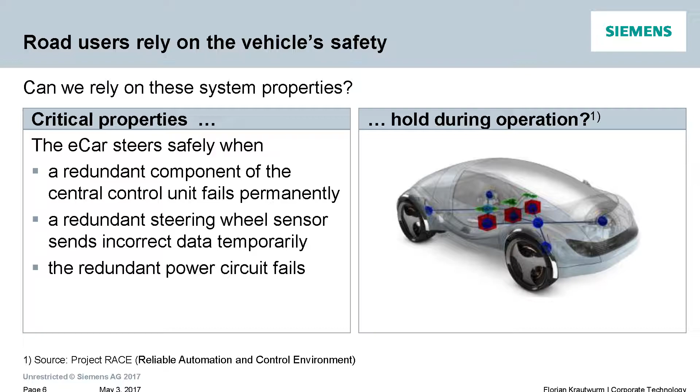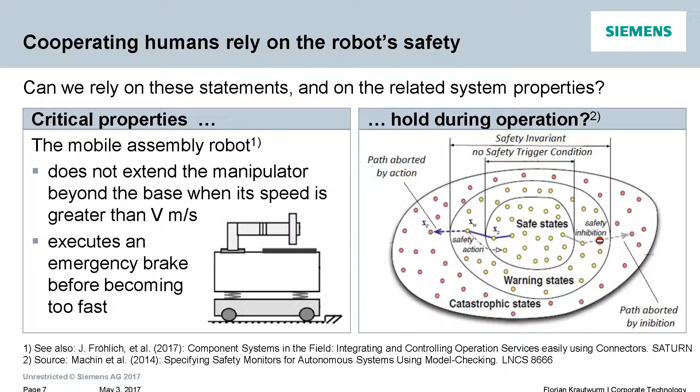And this idea of critical system properties is not only true for eCars, of course, but it can be transported to any domain. So let's have a small excursion to the robotic domain. And you might remember this example of the mobile assembly robot if you attended my colleague Markus Lachenmeyer's talk on connectors yesterday. And just as an example, we want to be sure for the manipulator here that in operation there is no accident in human-machine or machine-machine interaction, and therefore there are of course several critical system properties that should be fulfilled, that should hold during the whole operation time.

But back to the road. What am I talking about? So this critical system property I'll show you in a scenario. Here we have the scenario of the safe steering function in 3 phases. In the first phase, you can see a happy driver. He's reading his newspaper. He can do this because he's, of course, driving autonomously.

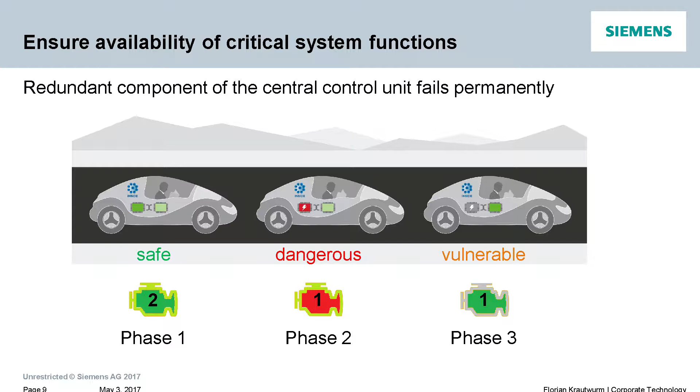You see that there are 2 components in the car. There's a dark green one, that's the component that's at the moment executing the steering function as authority. And there's a backup component in there, that's the bright green one. So in phase 1, we are safe. We have 2 components at all.

In the next phase, all of a sudden, something dangerous happens, and the component that is at the moment the primary, the former dark green one, shuts down. So for a short period in time, there is no component at all that's now executing the steering function as authority. The driver is unaware, but of course, that's a dangerous situation.

Fortunately, in the last phase, the former backup component gets promoted to a new primary one. So at the end, everything is fine. We have a happy end. The driver is still unaware, but now should, of course, be informed that there's a problem and that he has to go to service. So having seen this scenario, let's analyze it phase by phase.

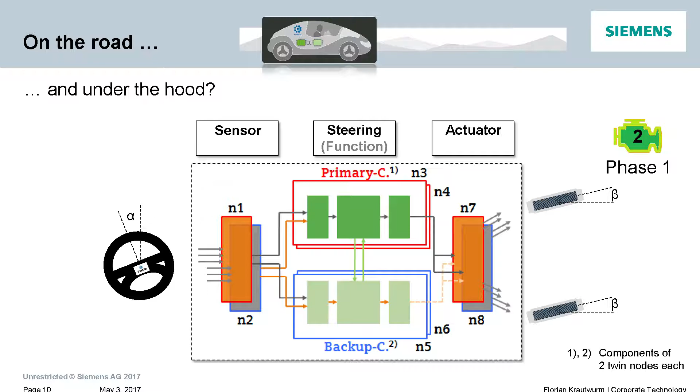Back again in the first phase, we see the happy driver. There are again 2 components in there, the dark green one, that's the authority for the steering function, and the bright green one as backup. And if we look at the center of the slides, we can see that the authority component is called primary component, and here's the backup component.

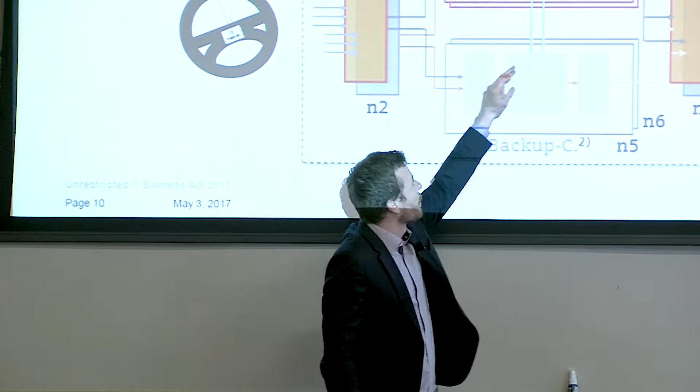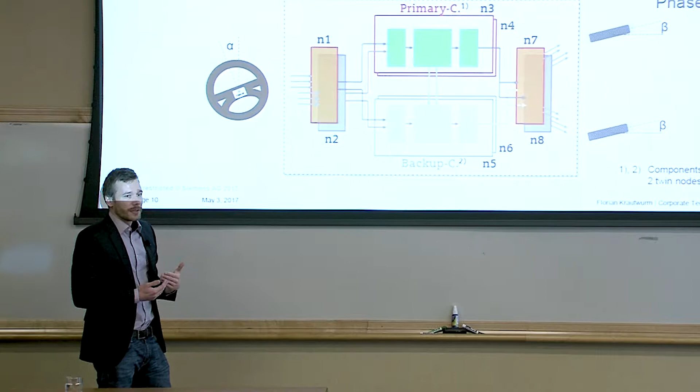And each of these components actually consists of 2 nodes. So for the primary component, we have node 3 and node 4. And so it's called a dual node. So we have 2 dual nodes in here, and in the primary component, the nodes, node 3 and node 4, are monitoring each other. So they can see each other's state and can see what happens. The same is true, of course, for the backup component.

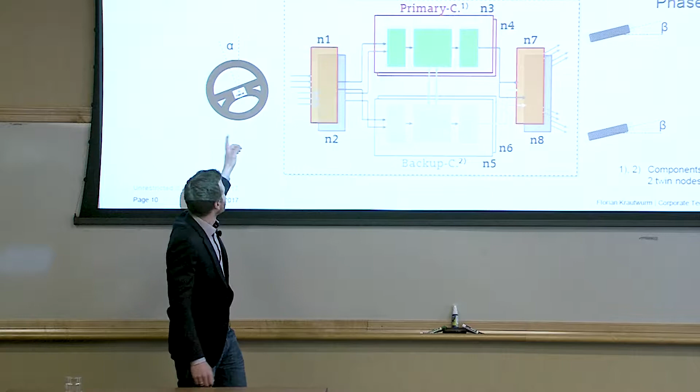We can see that there are 2 redundant sensors on the left, the steering sensors, and we have 2 redundant steering boxes on the right that are controlling the wheels. The steering sensors are sending the data to the primary component, but also to the backup component, and they're doing this clockwise and counterclockwise to also get redundancy here.

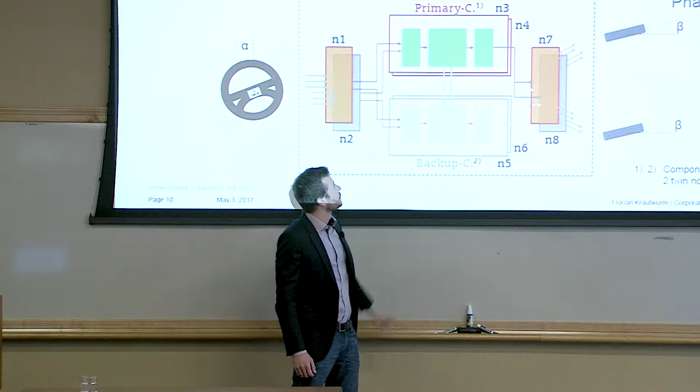On the other side, we can see that the steering boxes are just getting their data out of the primary component. So that's the master component for the steering function. The other one is just in hot standby. So we have 2 components, 2 dual nodes, and we are in safe mode.

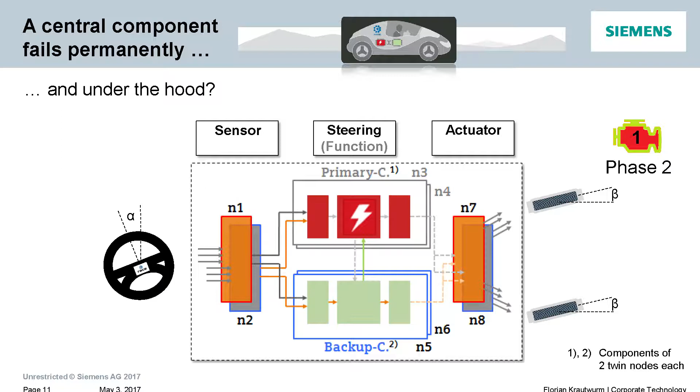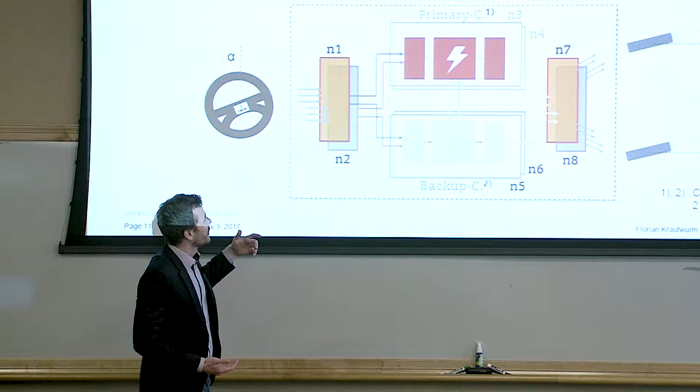So now again, all of a sudden, for whatever reason, something dangerous happens. Node 3 and node 4 that are monitoring each other, they detect an inconsistency and they decide to shut down the system. So for this short period of time, there is no primary component, there is no one as authority executing the steering function. Nevertheless, the steering sensors are sending their data to both components, but now we see that the steering boxes aren't getting any commands at all.

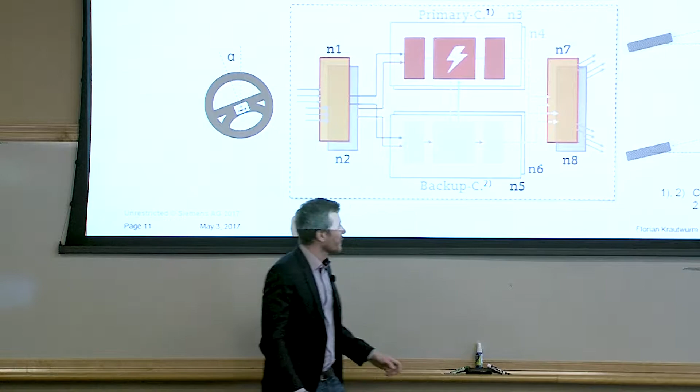I think we can agree that this is a dangerous situation and that the eCar integration platform, that's the thing we're seeing here, has to detect it and has to repair it silently. So the driver wants to be unaware, reliably of course, and especially quickly. Fortunately, that's exactly what happened.

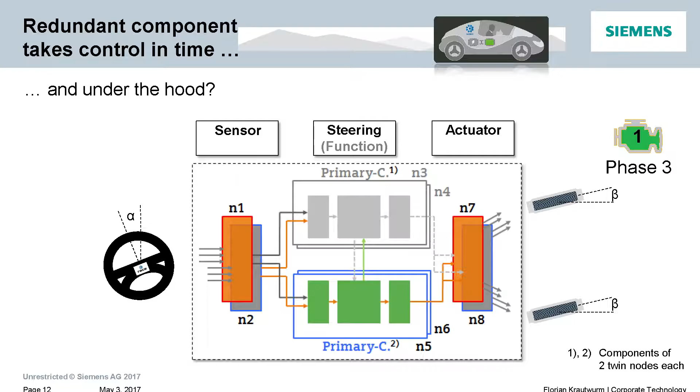So in the third phase, we see that the former backup component was promoted to the primary one, and these components are of course also exchanging data. So these sensors are still sending data to both, but now the actors, the steering boxes, are getting their commands from the new primary component.

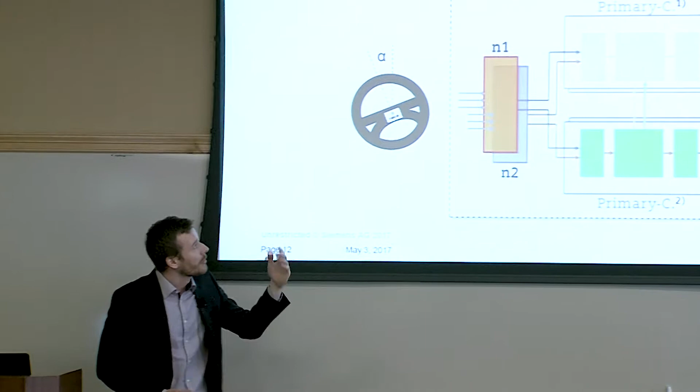Everything is fine. The driver is still happy, still reading, but now has of course to be informed that he has to go to service, because in vulnerable mode there is no longer a backup, and of course we need a new one and it has to be repaired.

Having seen this, how does the system under test look? No, first we see again a critical system property. The property says again that the eCar steers safely even when the redundant component fails, and we see again the three phases. And to test this, before we see the system under test, we of course have to derive testable statements, testable requirements. In our case, critical apps run on at maximum one primary component, so we always had just one.

In safe mode there are at least two components running the critical app, so we have a primary component and a backup component. In dangerous mode, the critical apps run without a primary component for a specified number of cycles. We called it Y, and this Y is dependent on the task, in our case the steering function, but also the state, the environment, so what's the weather, how fast are we driving, and things like that. And in vulnerable mode, critical apps run on exactly one component, and this has to be the primary one.

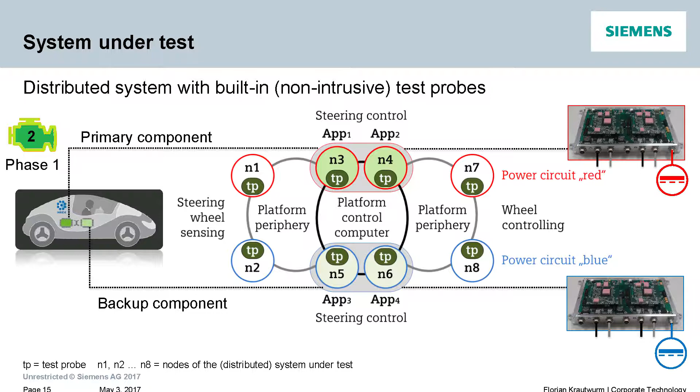Now we see the system under test. That's the central integration platform, and essential for our test cases are again the two nodes we see here. On the top again the primary component consisting of node 3 and node 4, and the backup component consisting of node 5 and node 6. We also see again the two redundant sensors and the two redundant steering boxes. And that's now the first time that you can actually see the test probes that I promised you at the beginning. So we have dedicated test probes that are an integral part of each of the system nodes, and we'll use them some slides later.

The sensors and the steering boxes are part of the platform periphery, and they are connected to the inner nodes by a so-called outer ring. That's the gray one. They can communicate. And we saw also that the inner nodes can communicate, and they are using this inner ring. That's the black one here. On the right, you can see the actual hardware. Each of these is one dual node consisting of two twin nodes each. And you can see the dedicated ports, so we have ports for the inner ring and the outer ring each.

And you can also see that we have a redundant power circuit. The red one for the upper nodes and the blue one for the nodes on the lower side, because a cut through the power circuit would be a single point of failure. And so we also need redundancy here.

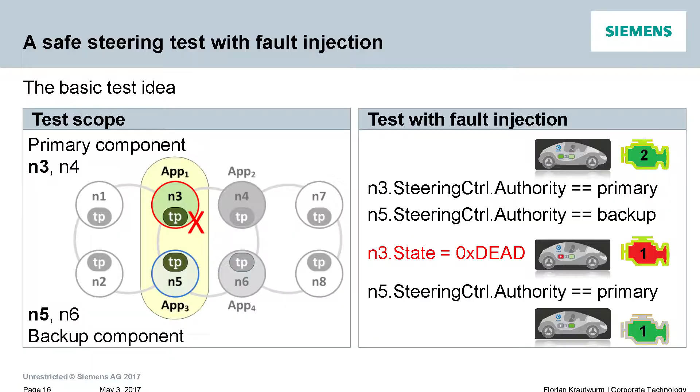So what's the basic test idea now? The basic test idea is to restrict the test scope to just two of the nodes of each of the different dual nodes. So we're taking one node of the upper dual node of the primary component and one node of the lower dual node. And the reason is that we can exploit the fact that for corrupting the state of, for example, the primary component, it's enough to corrupt the state of just one of its constituting nodes, because they, as I said before, are monitoring each other and therefore will find the error and shut down.

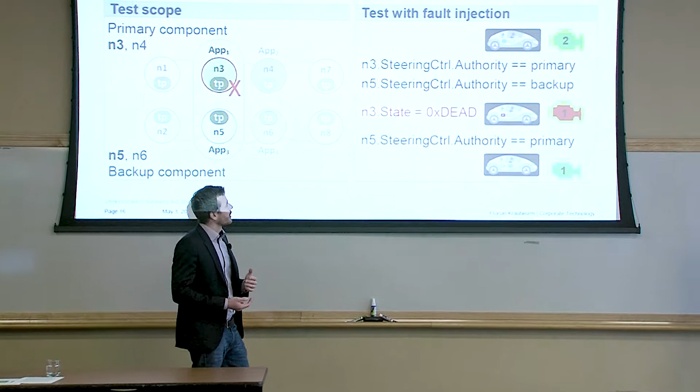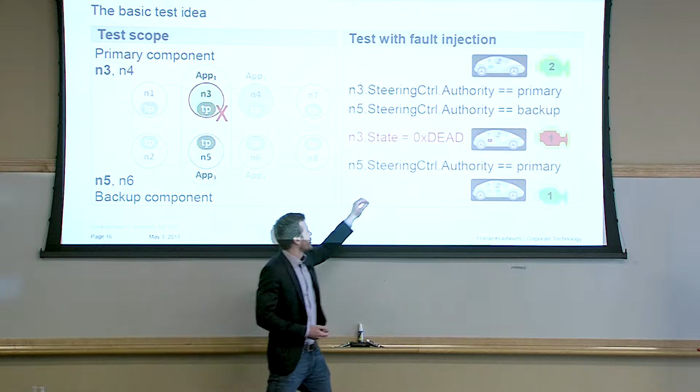You can see the basic test idea on the right. For the steering function, we want to start in safe mode. That is, we need a primary node for the steering function, that's node 3. We need a backup component for the steering function, that's node 5. And now to get into dangerous mode, we need to shut down one of the nodes, and we are doing this by injecting an error in the state of node 3.

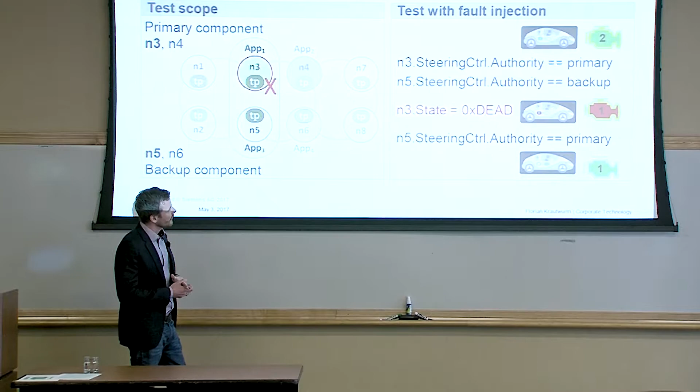Now the two nodes of the primary component will detect this inconsistency and therefore will shut down. And hopefully, after a period of time, the former backup component, node 5, will be promoted to the new primary one, and we end up in the vulnerable mode. And if that's the case, the test case will succeed.

So after all this explanation, we are finally ready to have a look at the first real test case. Wow, and I have to admit that's a heavy one, just right before lunch. But don't worry, we will have a short walkthrough together.

So we see that we want to test a critical app. That is our steering function, and we want to be sure that it continues even when the primary component fails. Therefore, again, we need two nodes, node 3 and node 5. Just let me jump back. These are node 3 and node 5 of the two different dual nodes. And we want to inject an error in the state of node 3 starting at cycle 10 for 3 cycles.

And that's exactly what we do on the right. We need the primary component, that will be node 3. The backup component will be node 5. And we are using the invariants I promised you at the beginning. This invariant will be checked in each cycle, and it has to be true in each cycle. Our invariant is defined as either node 3 is primary or node 5 is primary. That was the first requirement we saw on the slide with the critical system properties.

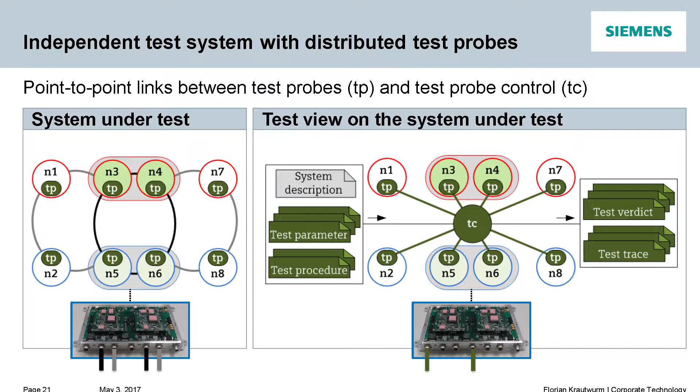And here you can see one important measure that we are using for non-intrusiveness and for testability. We are using a completely separated network in the eCar. So it's really a physically separated network as an example of exclusive hardware-software resources. And you can see on the bottom, again, the actual hardware with the inner and the outer ring each. And there are 2 ports left, and even these 2 ports are dedicated ports just for the test network.

You can see that the test network is organized as a star. So we have the test controller in the center, and it's connected to each of the distributed test probes to guarantee a fast point-to-point connection here. So we can stay in the time slots that we have in the time-triggered cyclic system. That's, of course, not the only measure that we are using. There are multiple ones. And I just want to pick out 4 of them on the next slide.

We are in a time-triggered system, as I said before, and we can use this cyclic time-triggered system because here we are in control and not the environment as it would be in an event-triggered system. And therefore, we can guarantee a deterministic behavior and therefore also deterministic tests for the system.

We have a data store in each node that is not to be confused with a real database. It's a memory area where modules and drivers of the node can store data and read data in their own part each, and it's also used for communication. So all the communications inside the modules, inside the services, run using this memory area.

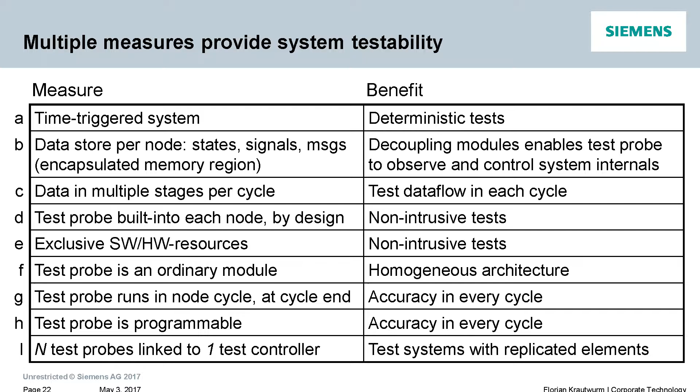One such module is the test probe that is built in by design. So it has its own time slot. It's non-intrusively usable. And this test probe is the only one that can read and write the complete memory area. That's what we did in the test cases. We injected an error in the state of the database.

And we saw on the last slide that we had a dedicated network as an example of exclusive hardware-software resources that we, of course, also need to non-intrusively test, to have no implication on the runtime of the system under test.

Thinking back to the picture of the hardware that you saw of the dual node, we now have a look at a single node. So here again is the complete hardware with node 3 and node 4. And that's a picture of just one node, in that example node 3. You can see the database residing in the center. And we have a scheduler that's cyclically time-triggered, and it's scheduling platform services and platform applications.

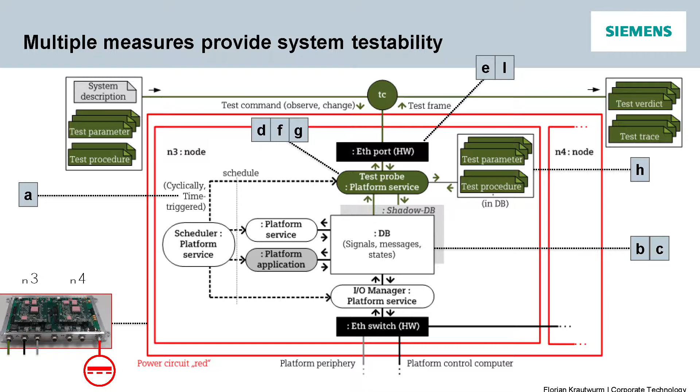We have an I/O manager, a platform service that's needed to get data from the network and store it into the database. And we see that the test probe is also such a service that is scheduled, time-triggered cyclically, and that can access the database. And as I said before, the test probe is the only one that can read and write in every one of these areas.

The test probe again has this dedicated connection to the central test controller, and the test probe is controlled with test parameters and test procedures as we saw in our test cases. The test parameters, procedures, but also verdicts can be transported from and to the central test controller and can be gathered there.

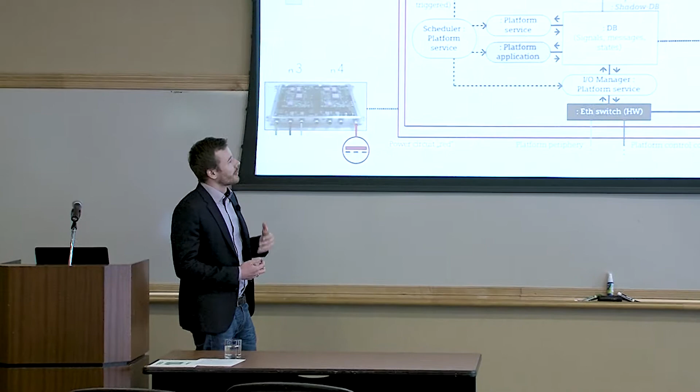This being the last picture of my presentation, I want to go back to its very beginning, although there are, of course, a lot of topics we haven't talked about today, like how to set up and tear down the test system, and how to do this in production. And of course, there are a lot more topics that would be interesting. But let me recap today's session.

So we saw that we want to get reliable statements about critical system properties. In our case, that was that the eCar still steers safely even when any redundant component fails. We tested this using probes that reside in each node by design, and we used these probes in a test case. So we wrote node3.state, and we injected an error, and we also used it in the invariants. And the invariants were used to test cyclically. They had to go through each cycle on states, signals, and data flows.

So we checked that either node 3 or node 4 was the primary component. We can do this non-intrusively, as I said before, because we are using exclusive hardware or software resources. We are using a test probe that can access the data store, and I showed you the list with a lot more of the measures.